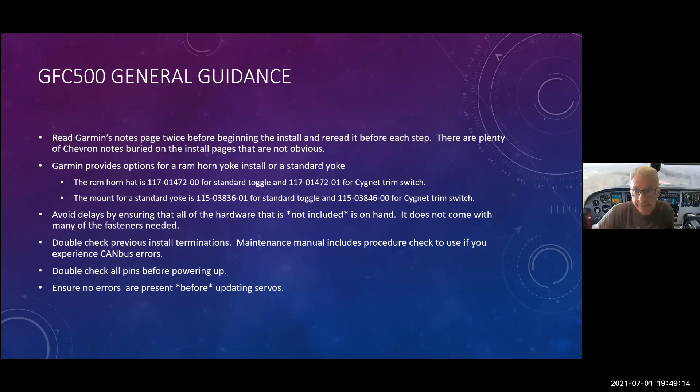I'll just do a pause, there's some rain in the background. CJ, can you still hear me okay? We can hear you great. Okay, perfect. I'm noisy, so I am not surprised.

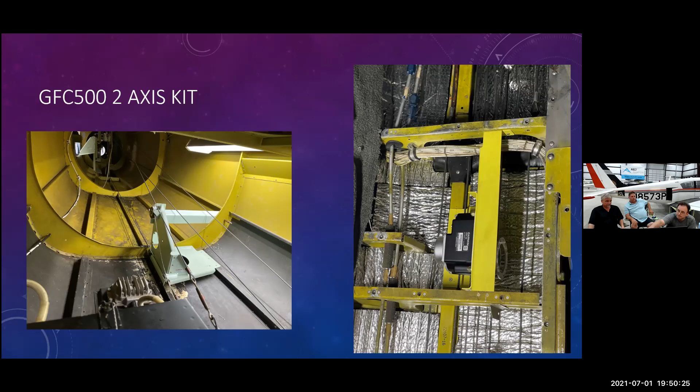So some lessons learned on the 2-axis kit. With the pitch, you'll be doing a significant amount of work in an awkward position in the tail of the airplane - that's kind of an understatement. If you had seen these guys' arms, with blood dripping down from sitting back there, it's very awkward. While the tail is big enough, it's challenging. So we found that foam pads help. There are these 2-inch foam pads that John and Jeff keep around, and by chopping those up and leaning on them, it made it a lot more bearable for longer periods of time.

The most interesting thing about the install of the pitch, which affects the yaw as well, is that there are rub strip cable guards that are difficult to install.

I say this because if you install them on the cables before you put everything else in, then you have to assemble it in the tail. Assembling all of the components is complicated to do while in the tail. If you do it outside of the tail, then when you put it in, you've got to actually put those 4 rivets in, and bucking bars won't fit very well after it's installed. So it's just one of those challenging things that we ran into.

You actually run into the exact same thing with the yaw and with the pitch. Those are the only places where they have those rub strip cable guards.

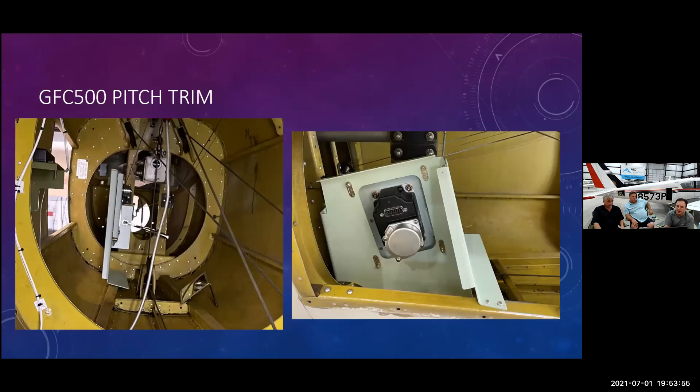The left picture here is what you see on the other side of that pitch trim servo. You can see it's got that large cable. It has that idler on top, and you can see it running forward. You can also see there's not a lot of clearance between that and the stabilator weight, which I'll talk about in just a second. On the right-hand side, you can see the trim drum after it has the new cable wrapped around it that Garmin does provide.

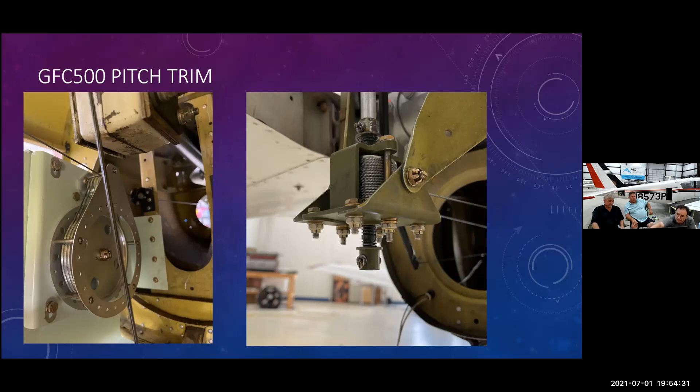The lessons learned with the pitch trim: we used a piece of safety wire wrapped around basically a tail weight stand that had a post coming out, and used that to connect to both of the front portions of the cable, both of the turnbuckles. This made it really easy for a couple of reasons. First, we did not have to redo anything with the front portion of the cable, we kept it intact by keeping tension on it. Second, it allowed us to spin it, so we could get to the different turnbuckles a little easier as we were doing different things on the plane. That was a huge win, and it saved us a lot of time.

Be very careful to count the wraps after the spool is installed in the drum holder. I say this because when I was standing there with John and I inserted the drum, I accidentally unwrapped half a turn when I handed it back to John. We were both looking at it, and when we installed it, we realized the error. We could actually see the error. It was my fault.

It's important to look at this when you're doing it, because it tells you how many counts above and beyond, how many wraps around. You can actually see when it has the right spacing. Just make sure you do it after you install it instead of before.

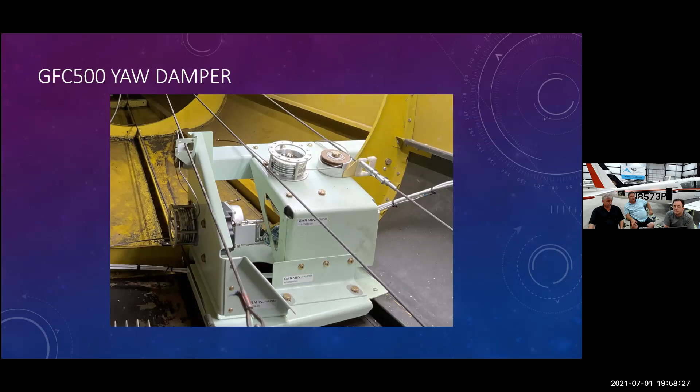If you look carefully in this picture, you can see the cables and the cable guards, and you can see exactly what I was talking about as far as it being kind of difficult, because it's an extension of that pulley, if you will. And if you look by the clecos, you'd see one of the Delrin pieces installed.

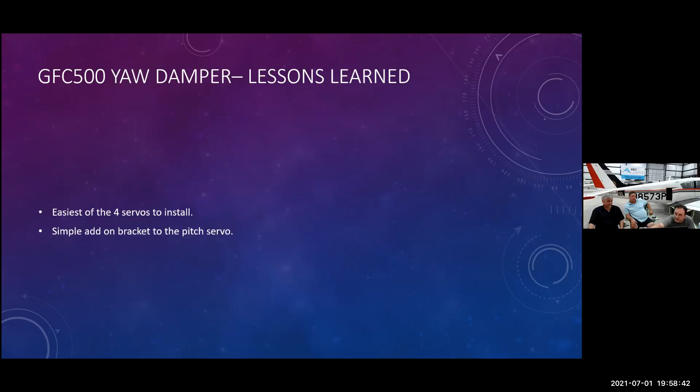On the yaw damper, I won't talk much more about it. It's actually the easiest of the 4 servos to install, really just a simple add-on bracket to the pitch servo. I'll show you why that makes a difference in just a few moments. Anything you guys would add to the yaw?

No. All right, so now I'm going to turn it over to John to talk about the installation timeline.

Just as a precursor, I know a lot of you follow the install on Facebook, and a lot of you saw lots of pictures, maybe some in horror at the amount of time it took, or maybe you were excited about the duration. But nonetheless, this is what it actually took us to do the install this time on the plane.

I'll pause for a second. Do you guys, can you guys hear me still? Yes, we have. You're just fine.

All right, perfect. As far as the installation time, day one was the plane disassembly and organization of the parts that come out of the box. I was there with Jeff. We disassembled everything, laid it all out on the table, and inventoried everything off the checklist to make sure we had everything ready to go. That's a good way to spend day one: organization, making sure it's all there, getting familiar with the installation, the parts, and the documents that come with it.

The pitch trim installation was the challenging part as far as an airframe mechanic or an A&P. It does take a couple of people, you have to have eyes everywhere. Again, measure, alignment is critical. Clamp it, cleco it, whatever you've got to do. Measure 3 times, cut once before you drill a hole. And then it all comes together like butter after that. Follow the manual, follow the manual, follow the manual.

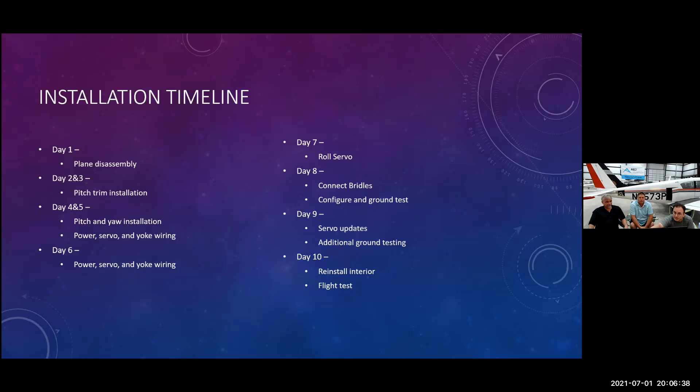I'll show you the flight test in just a moment. One thing I want to mention that's really critical - some of you have seen my video, some haven't, but you'll see it shortly.

A lot of people don't know you get an incredible amount of data out of the G5s and the Garmin system. If you have G5s, the GI275, or the G3X Touch, make sure it's logging the data. In this example, I literally took the SD card out of my top G5 attitude indicator, put it into my computer, and uploaded the CSV file to Garmin.

This can be used for so much - by your Garmin dealer to troubleshoot, or by your A&P to check you're not having alternator problems since it logs the voltage. There are so many uses for it, it's not even funny. I can even see the magnetic deviation I get.

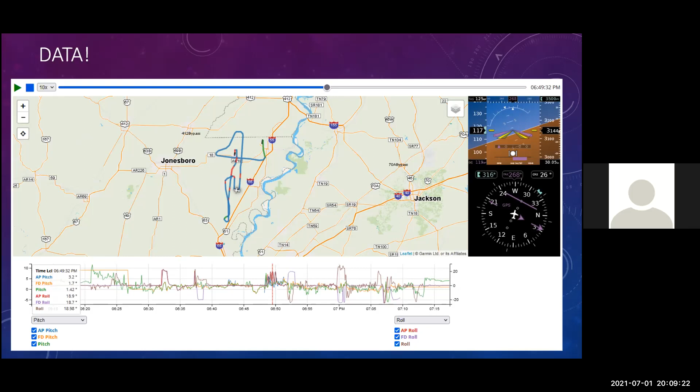Sonny, go ahead. All right, excellent. Just checking, can you still hear me? Yes. Yep. All right, awesome. The rain is picking up, so somebody chime in if it becomes a problem. One second, go ahead and mute your second computer, Sonny. Yep, I am. Okay good, one second, there we go.

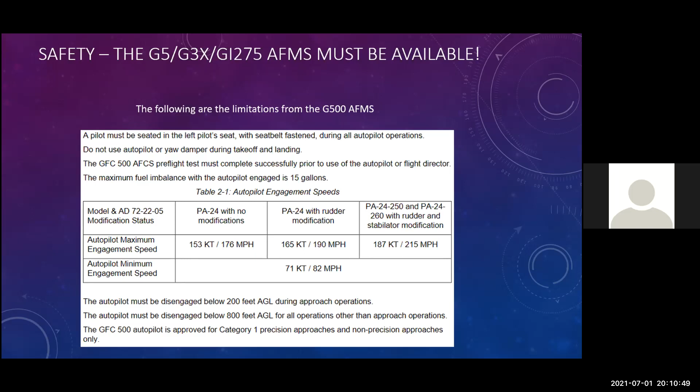Good point, cannot - I'm sorry? I said excellent point, Sonny. I actually drive a Tesla and I see all the people that do that with Tesla cars, and I just imagine them doing it with a plane. Anyway.

Do not use an autopilot or the yaw damper during takeoff and landing. As you may or may not know, the autopilot and the yaw damper can operate independently. So you can hand fly the airplane with the yaw damper on, or you can use the autopilot without the yaw damper. The restriction is you can't use either during takeoff or landing, and there are some altitude limitations you can see at the bottom.

I'll read: the pre-flight test must complete successfully prior to use of the autopilot or flight director. That's an important one.

This one was an interesting one. I haven't seen it called out too many places, but it's a good reminder for everybody on the call. The maximum fuel imbalance with the autopilot engaged is 15 gallons. It's actually pretty easy to get to with a Comanche with 4 or 6 tanks, I'm sure.

One thing that's important, and this comes back to what I talked about in the very beginning, depending on which modifications you have, it changes certain things. So if you've got the rudder modifications and the stabilator modifications, then your maximum engagement speed is 215 miles an hour. If you have no modifications, your maximum engagement speed is 176. So it varies depending on what you have installed in the plane. And your minimum engagement speed is 82 miles an hour for those that haven't seen it.

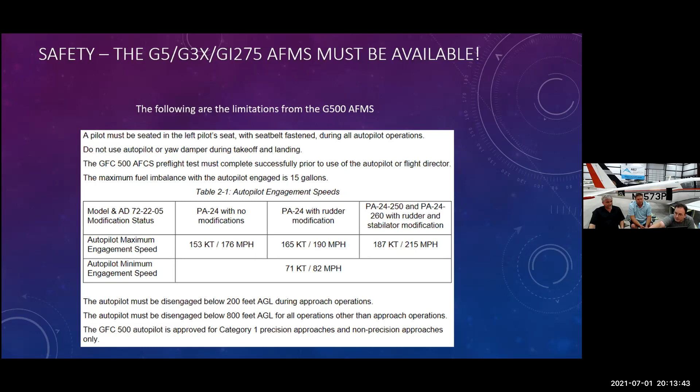I'll keep moving. All right, so the first test flight is here. I'm going to stop sharing for just a second, and then I'm going to share again. So bear with me for just a moment, and then I'm going to voice over the video.

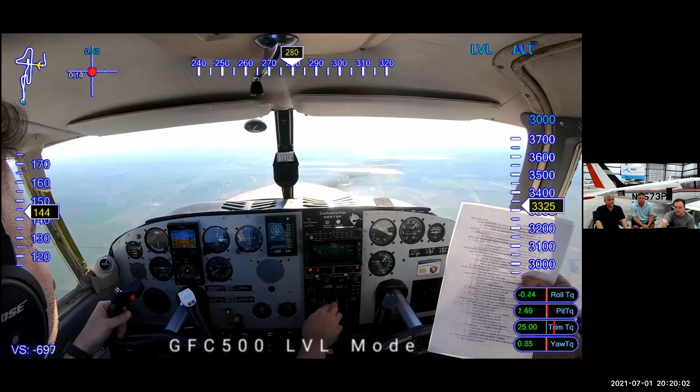There is the exclamation when we push level mode. You can see AP, YD, LVL, and LVL at the top. It is leveling itself, and you can actually see it holding the plane fairly well. That was the blue button test, the button my wife will push if I have a problem when I'm flying the plane. I've already taught her about that button. So that's it for the level test.

This next one is the nav and altitude mode. At this point the autopilot's engaged and the altitude is set to 3,000 feet. You can see the variance in yellow, basically going plus or minus about 15 feet at the most, which I'd consider incredible. That's arguably better than I can hand fly it, given my hours in an airplane.

At this point, you'll see I'm lowering the power in the plane because I wanted to do my tests at a lower speed. What's very interesting is in just a second, you'll actually see the plane command the pitch trim to turn in order to maintain the altitude I'm set at. You'll see it in just a minute. I'm probably ahead of it just a little bit.

In a moment, we'll also click the nav button. You can see I'm still in altitude hold mode. Now you see GPS illuminated at the top right, and now you'll see the plane start to bank to the right. You'll also see me with my left hand hovering very closely to that autopilot disconnect button in case something errant happened with it, but it didn't.

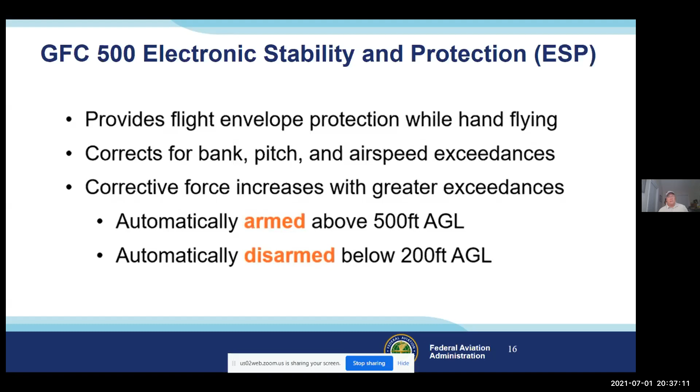This system is automatically armed above 500 feet and automatically disarmed below 200 feet. Later on we're going to talk about how to disengage this feature, which you can do a couple ways. Basically, when you exceed a certain level of pitch, it's going to force the aircraft back down, and same with roll - when you exceed a certain bank level, it's going to force the aircraft back to level, even when the autopilot's not engaged.

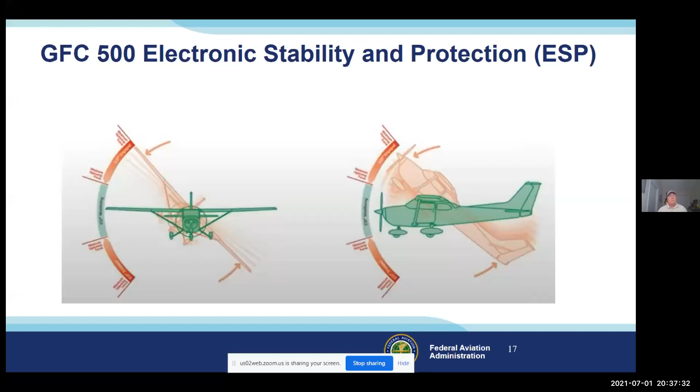So let's take a quick look at the roll side of it. The system discourages banking beyond 45 degrees, and as you increase that bank beyond 45, it increases the pressure to return the airplane back to wings level.

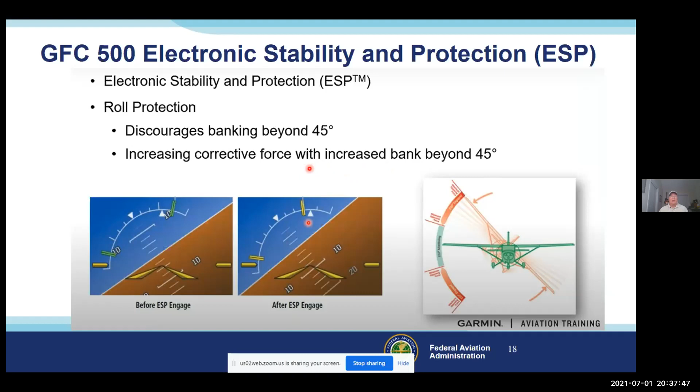The same thing is true in the pitch axis. You can see your positive pitch angle here and your negative pitch angle here, and those limits are set for each airframe. I'm not sure what they are for the Comanche - Sonny and I discussed that earlier today, but we didn't have a chance to look at the AFM which defines that, or the flight manual supplement for the GFC500. But it's going to limit your pitch attitude, and as you exceed that, it's going to push back.

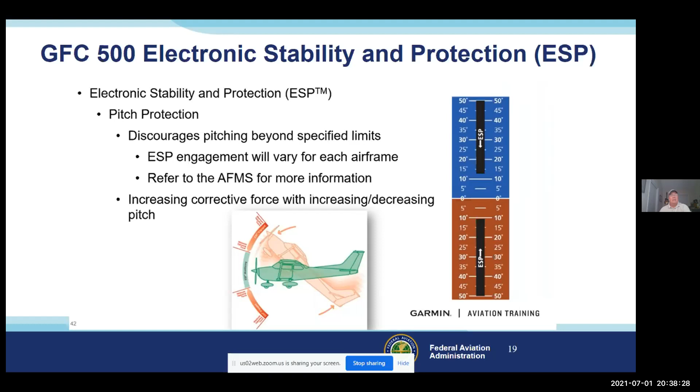I just want to emphasize that this is always on and monitoring your flight for safety. Another feature it has is that if it engages, it automatically engages a level mode if ESP is active for 10 seconds.

Active for 10 seconds in a 20-second time period. So in other words, let's say, God forbid, something happens to you and you get incapacitated and the airplane starts rolling over. If ESP is engaged for 10 seconds in that 20-second period, it's going to automatically engage the autopilot, and it'll climb above 2,000 feet and level via the ESP. So it's going to automatically level the aircraft for you.

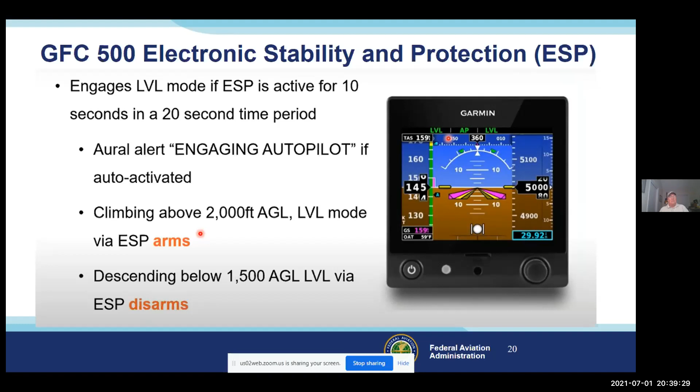If you're above 2,000 feet or descending below 1,500 feet, ESP disarms. So it's just a good safety feature, God forbid something happens to you up there.

It also has high-speed protection, and it pitches nose up to prevent exceeding VNE. Low-speed protection prevents the aircraft slowing below a specified speed by lowering the nose. Some of the requirements are that you have to have a GNS WAAS and a GTN or GTN Xi, and this feature is also always inhibited below 200-foot AGL.

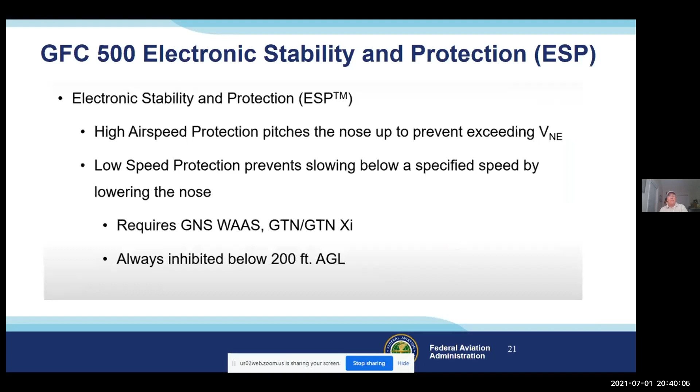When overspeed protection kicks in with the autopilot on, it automatically pitches the nose up to reduce the airspeed if exceeding VNE. You get a visual alert, max airspeed, as indicated in this yellow indication. Your vertical mode will change to IAS, indicated airspeed, and the previous vertical mode will be changed to armed. Then upon speed reduction, the previous vertical mode becomes active again.

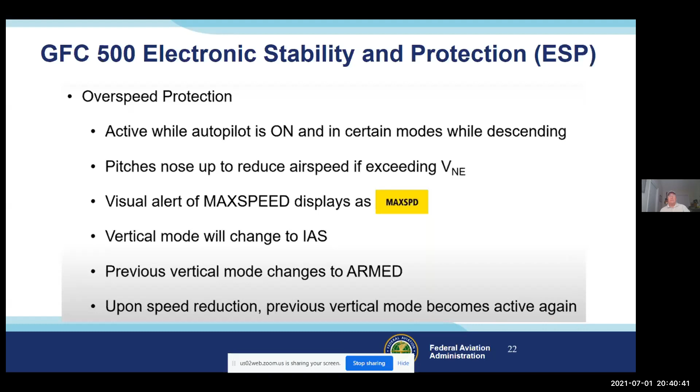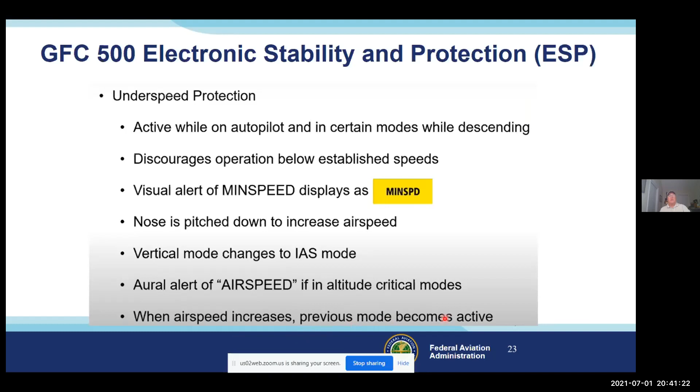And then for underspeed protection - again, this is when the autopilot's engaged - this discourages operation below the established speeds. When you get below that airspeed, this minimum speed pops up on your display, and the nose pitches down to increase your airspeed. The vertical mode changes to IAS mode, and an aural alert of airspeed if the altitude is in altitude critical modes. When the airspeed increases, the previous mode becomes active.

So there are ways to disable this feature if you don't want it on. The first and quickest way is to hold down the autopilot disconnect button on the yoke, and while it's held down and the autopilot's disconnected, that feature is disabled.

So let's say you're doing an approach and for some reason the system thinks that you're getting below your airspeed, and you know that you're good - you can hold the autopilot disconnect down and just manually fly the airplane and override it.

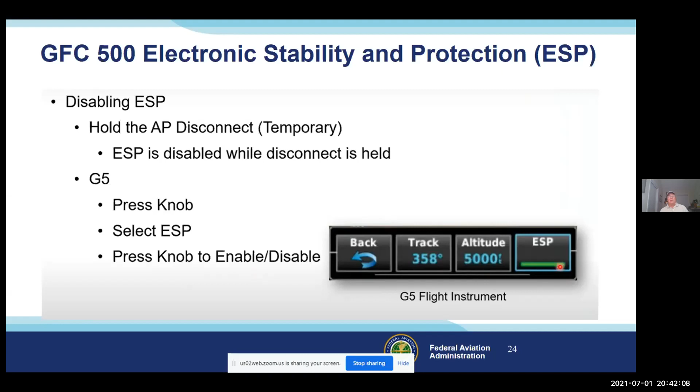If you have a G5 installed in your aircraft, you can manually disable it by pressing the knob and selecting ESP, then pressing the knob to enable or disable it. That green annunciator right there would go on and off, indicating whether it's on or off.

If you have a GI-275, the same thing's true with the autopilot disconnect switch to temporarily disable it. In the GI-275, you hold the knob, swipe up, select the options, and then select ESP to enable and disable it.

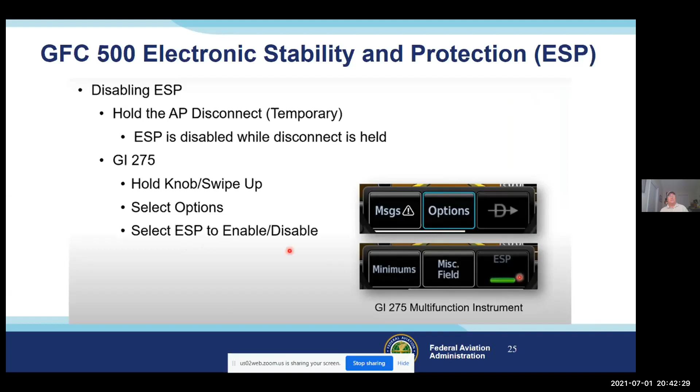And then the G3X touch, same thing with the autopilot disconnect to disable it. Then you touch the AFCS box button and select ESP to disable and enable it.

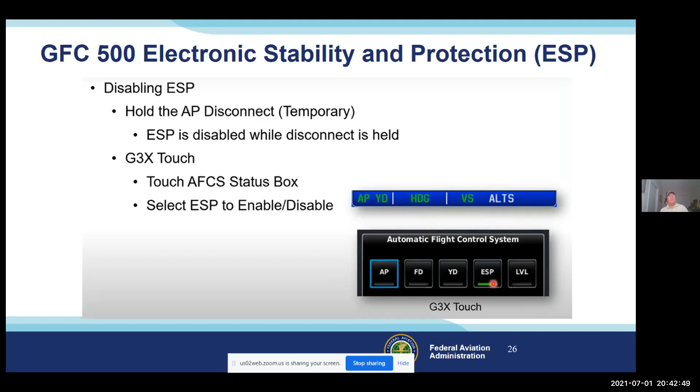I wanted to share this warning feature. It's important that, whether this be a Garmin autopilot or another autopilot, you do not overpower the autopilot, especially in the pitch axis, because the autopilot senses the pressure you're exerting on it and thinks it's out of trim. What will happen is the trim will start running in the opposite direction, trying to remove that pressure. This can result in a large out-of-trim condition when that autopilot's disconnected. So you want to avoid opposing it.

And lastly, I wanted to just take a look at the GFC STC maintenance manual.

And it includes what they call instructions for continued airworthiness for this STC. So all the airworthiness considerations for this autopilot are contained in this document, and it can be found in this link if you want to do a screenshot. If you're interested in downloading, you can just go on Garmin and Google the AML STC maintenance manual for the GFC500, and you can get it that way too.

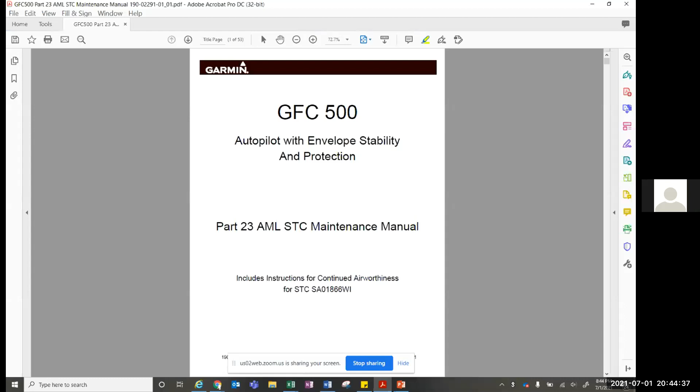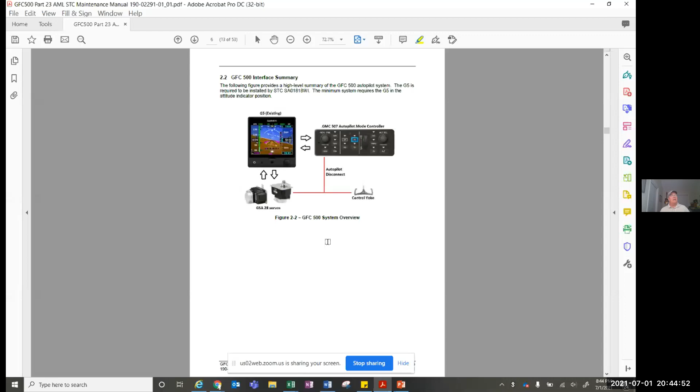So this is what the manual looks like. I'm just going to go through some important parts here. It talks about the maintenance of this autopilot, the pre-flight requirements, gives a basic functional description, and talks about current draw here.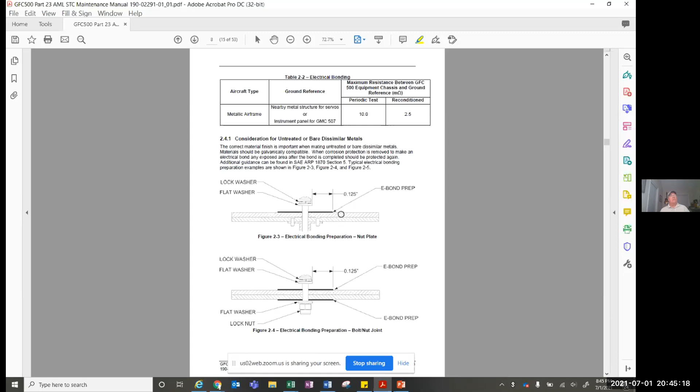Talks about ohmic bonding, or the bonding, which is very important for the trays and the grounding of this system, for lightning protection and preventing noise introduction into the system. Grounding can be a very important thing. As a matter of fact, later on we're going to see where that's a required test every, I think it was 2,000 hours, but we're going to look at that.

And so this is, again, that official document that needs to be part of the STC package, and you should maintain this as an aircraft owner. It's the instructions for continued airworthiness. This is really important to have with you and have your mechanic have, because it's going to detail all the requirements to maintain the airworthiness of this autopilot system.

First, I want to mention that this autopilot is on condition servicing. So that means that there's no real requirements, like the servos don't have a TBO on them, or the gyros, like in some of the older legacy autopilot systems, which may have a time frame on them. There's no time frame on this.

It talks about the required tooling to maintain it here in this section, and then it talks about maintenance intervals. And I just wanted to point out some things.

This equipment electrical bonding test, which I talked about and just mentioned earlier, is very important to maintain. And as a matter of fact, so important that every 2,000 flight hours or 10 years, whichever is first, they want you to perform this test. And in this document they have all the procedure for doing that.

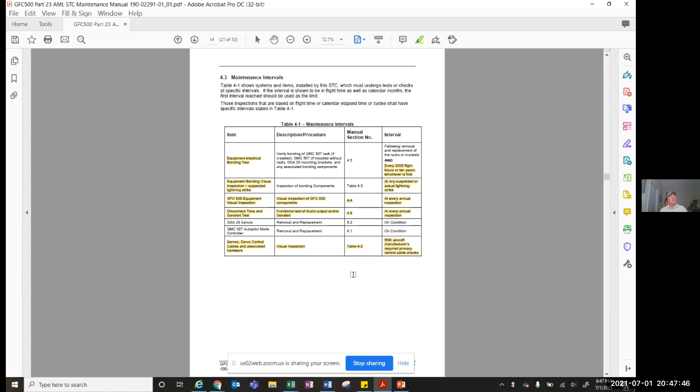And they go into detail what the visual inspection procedure is. And that's, again, a good thing to present to your mechanic and make sure that they're doing all these tests. Again, the lightning strike inspection procedure is very detailed on what you should do.

Just going on, again, some details and a little bit more. I wanted to show you the manual electric trim, pitch trim speed check, which is dependent upon your particular airframe. You basically run it from one stop to the other, both up and down, and it should be in a certain window of time for that running.

This is a document that should be supplied to you also after the installation, and this basically records all the details about the system components that are installed in your aircraft. It talks about the configuration of your system, and you can have this as a record, so that if for some reason that data is lost, you've got a record of how it's configured as installed in your aircraft.

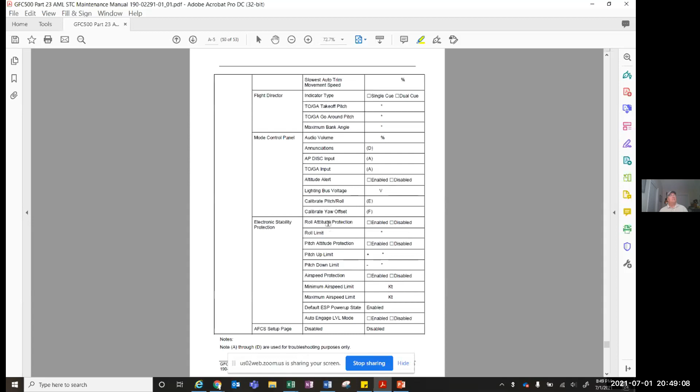It's very important that that be filled out properly and accurately. This is also a good thing where your mechanic's going to identify where that roll servo is installed, where the pitch servo and the yaw servo and the trim servo are installed in the airframe, both looking down from the top, but also from the side of the aircraft.

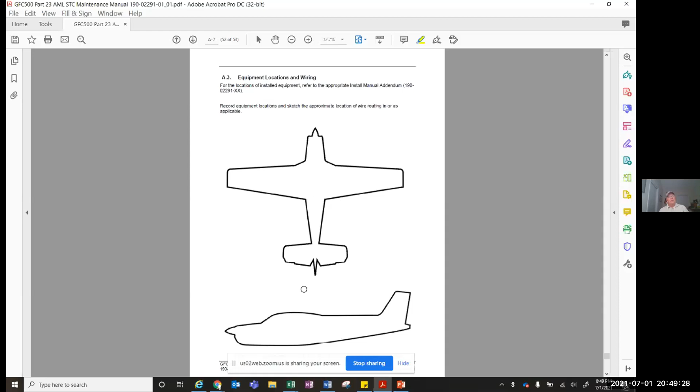And then it's going to talk about the wire routing too, if it was a twin aircraft. See, they're already ready for the twin Comanche. They've got this already incorporated in there.

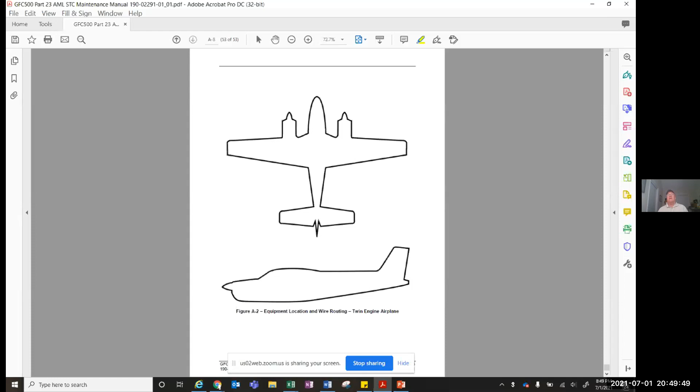And that's it. So I hope that you found that information helpful. And I'm going to stop sharing my screen and hand it back to you guys.

That's because you don't have to be wiping us off the floor when you find our sad little bodies when we don't use them.

Then became the avionics manager, kind of got it from all sides, and it makes your input, having that broad perspective, really uniquely valuable. So thank you for coming in and taking the time to go through the manuals and highlight for us some of the things we really need to be looking at.

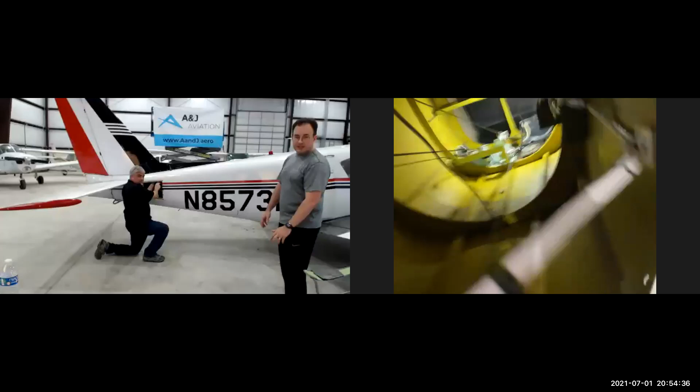So what we're going to do is go in the tail, and John, do you want to hold it? And so can everybody see? You can see, I'm pointing at my screen, not that it helps, you can see the pitch and the roll servos.

And you can also watch the tail, by all means watch the actual stabilator. Jeff, do you want to do pitch? Yeah, those hands are clear. Good job. All right, can y'all see it moving? And how smooth that is. Do y'all see it or no? Yes. All right, so perfect. Pretty exciting to see it go.

So the other one, he's doing the roll right now. No, hold on, we'll go down. You want to do the pitch trim real quick so they can see the actual trim going once it stabilizes? So you can see it going back down, and in a second we'll use the manual electric trim, and you can actually hopefully see the trim go the other way, Jeff, if you can.

Or no, I guess you should have went that way. You should have went the other way. I don't know if you guys can see it. Can you guys see it, Target? Yes, yes, all right.

So you can actually see it's actually turning up with the camera. You can obviously see it rolling through. Yeah, I think so, there we go, yeah. It's going right now, yep, it's going right now. And if you look at the plane, you can probably see it.

Garmin is sensitive to the speed of your plane, so it can run a different speed whether you're going fast or slow. Obviously this is a different speed.

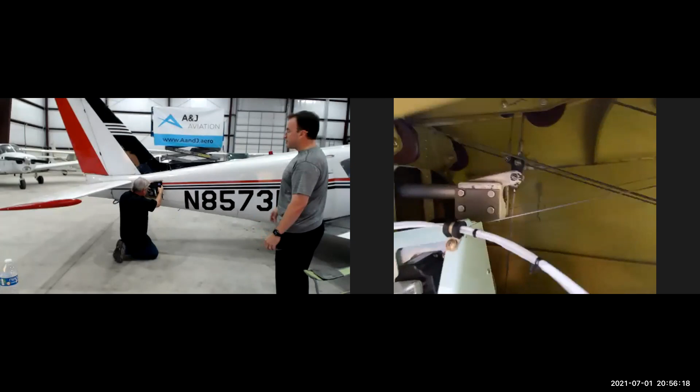So do you do pitch? Yeah, and we'll do pitch again, and you can see the balance weight going up and down. The pitch up. One second.

And while you're doing it, just because this just came up in the chat window, is that idler pulley lubed internally, or?

I don't know that I can answer that question. It is a sealed bearing inside it. So I believe because it's a sealed bearing, it basically doesn't need lubrication, but I would defer to your A&P or your Garmin dealer for that. That's correct, that's correct, Sonny.

So you guys saw the pitch, and let's see, do you want to see the roll? Jeff will show you the roll. Can you guys see in the plane? All right, and so now Jeff will make it roll. Thanks a lot, Sonny, if you could, okay, there you go, we can see that.

Hopefully you guys can see it banking back. If you go back the other way, yeah, if you could actually see, can you go back? Yeah, I'm going back, you'll see the move. So, very smooth and just very, very fluid. There you go. So it's the whole new ghost in the machine.

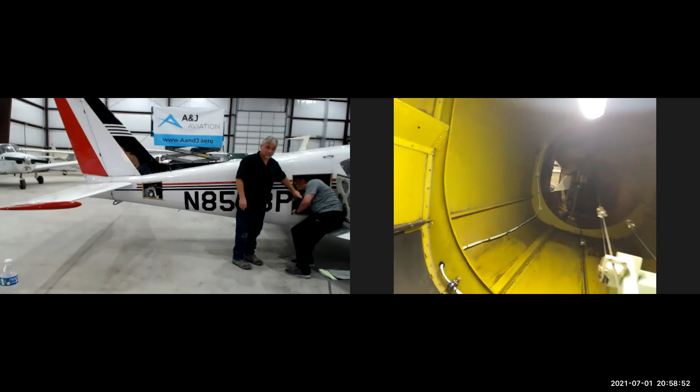Okay, so you can actually see down there the connections, the way it's all wired up. You can see how pretty it is with the Adels along the side and the lacing, and how clean it is. In fact, it makes the rest of my plane look dirty.

You want to look at the roll again? I've got it where we can. If let's see, we'll... Roll left, roll left, really precise. And then roll right, you can see it just kind of spot on.

That's going in, is that in heading mode, Jeff? Yes, so that's in heading mode. So you can see it's using the magnetometer to do that. And of course you can see the tips roll as well.

And then Jeff will disconnect, and I'll also show you, no it's okay, we're okay. All right, I think, and so there are still some panels to put back on the plane, just to be crystal clear. But for you guys looking, we've got to fabricate a new panel for the bottom, but this...

Yep, so this is effectively my Comanche panel now. And like I said, we still have one or two more things to put on, but she is airworthy and she flies beautifully and the autopilot works like a champ.

One thing I will say to everybody - we're going to power the plane down, but I'll leave this on for just a moment. The head unit, the GFC500, it's not just a button panel. It's actually got accelerometers in that unit, so if it's not mounted, or it's moving, you have to have it mounted before you do the calibration. I say this because Jeff knew it already, I didn't, and I really thought it was just more or less a button panel. It's not, it's smarter than that. If you read the forums, I've seen reports of people having it go bad and needing it replaced. So it's not just a dumb button panel, it does have smarts built into it - very advanced.

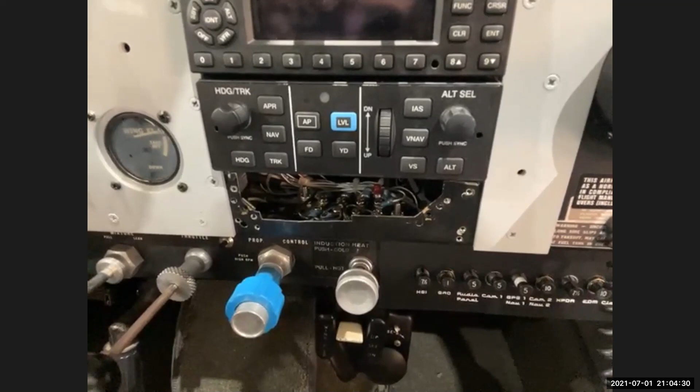There's a question about a disabled person getting into the 260. I don't know that I'm the best person to answer that one, so I'll defer that for now. How does the idler pulley get lubed? Let me jump into that one very quickly - our Comanche 260B, before we had it, was owned by a person with polio, and they flew it with a hand control. I don't know what the full question was because I actually had a disconnect that killed my chat window, but does that partially answer the question?

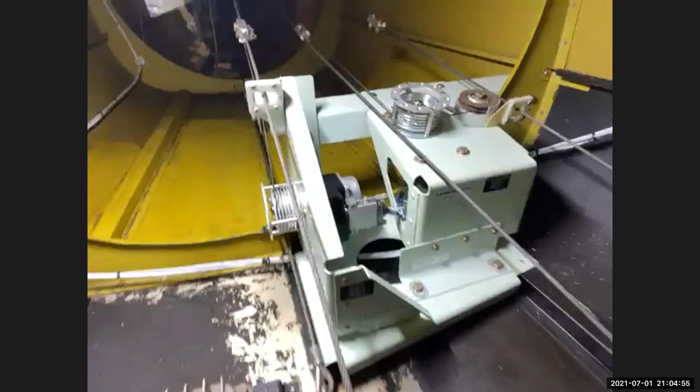All right, should I - I would say this capability would have been amazing. Yes, should I continue, CJ? Over to you, Sonny, go ahead, continue.

All right, so idler pulley getting lubed, that one we talked about, it's sealed. I agree with Nima, the pilot's guide is a wealth of great information. Agree about the stabilator weights, no question there. Somebody asked if I don't have a vacuum pump anymore - no, I do not. As part of the G5 installation, the dual G5s, I actually removed the vacuum pump from the plane. It was actually not used for anything once I installed the dual G5s, and I'm happy to be rid of it, to be honest with you. I lost a lot of weight in the plane when I was able to remove that, not from the pump itself, but just from all the tubes and whatnot that went to it. Behind the panel opened up a ton.

Should the pilot be hand trimming out that servo torque? I don't think so. Part of what gets you in trouble is overriding the autopilot in any form or fashion. Because this one has auto trim, I don't believe I should be trying to override it at all. I think that would be dangerous. I could disable the trim and manually trim it, but I'm not going to do that.

There's a question about Baron Pilot. I know A&J did the install on Baron Pilot, so I'll let Jeff answer that. He had to step away for a moment.

I did not have to drill out the floorboard rivets - you asked if it was done already. My floorboard did not need to be drilled out because it already had the nut plates, so we were good. I was very thankful for that, as was Jeff. I am fearful that would be a pretty big undertaking by itself.

Nima answered something about pricing, I won't go to that. Can I rename my iPad to Sonny?

Someone asked whether the pricing included G5s or GI-275s. No, the pricing assumes you have G5s, GI-275s, or G3X Touches appropriate for the plane - it requires that to be in place. You could get by with one G5, but you'll compromise on functionality, just like you could get by without a navigator, but you'd lose the GPS nav function. That's an important thing to note. A&J can do any of those things for you if you choose.

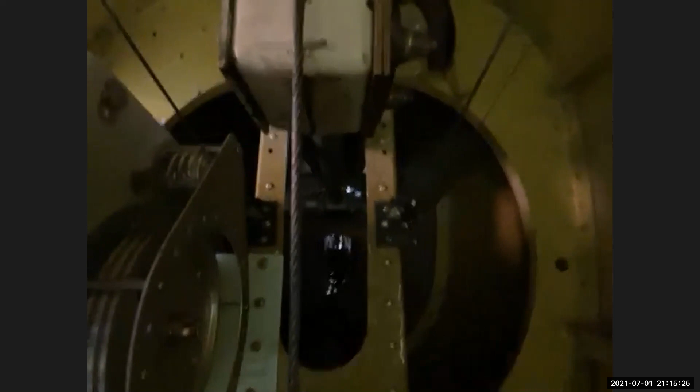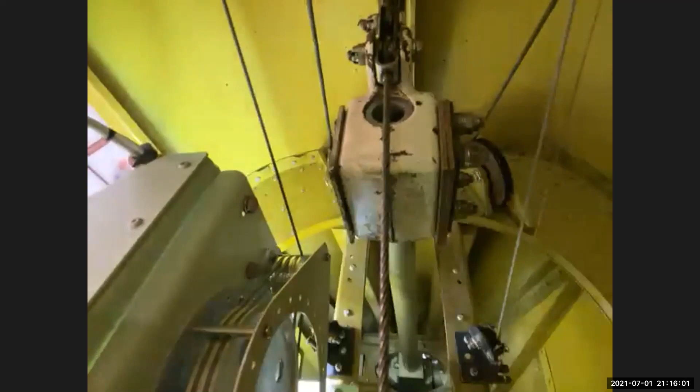Right, yeah - other way, other direction, the bulkhead, there you go. If you notice the two drilled holes left and right above the two pulleys in the phenolic guides - there's actually a phenolic guide on my '59 that has the cable going through it. In later models, Garmin is going to come out with a revision saying to drill the phenolic guide off and just install the bridle cable on the trim servo. But it's kind of funny how your model has the holes drilled exactly where my phenolic cable would have been installed. It's really funny, Hunter, because we've got another Comanche in John's hangar that's actually in the corner.

It needs some love if anybody's interested in a Comanche, but it actually has the phenolic blocks with the lines through it. So after you told me about that, we went and checked that one and saw it, and I was thankful. My avionics tech actually emailed Garmin and they're on it. They sent out a tech, and they're going to revise the manual. What they said was to drill the phenolic guide off and drop the cable down just a little bit to line up with the bridle cable on the servo. It's crazy to see the different variations of the models.

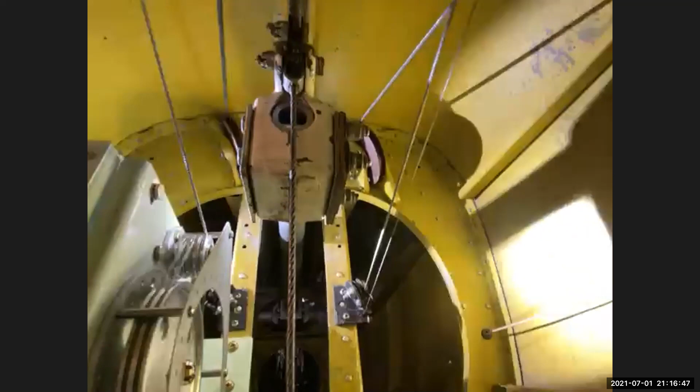Another thing on my '59 - don't quote me on this, but I think Zach Grant said everybody had a riveted-in floor till 1963. Before that, it was all riveted in with explosive rivets, so you'd put heat on them and they'd explode, like back in wartime. We had to cut holes in the floor for access, so we don't have to drill the floor out every time we want to work on the servo. It was pretty neat and different. I think 1963 and older are going to cause a bit more of a price increase because of the labor to install the servo.

Well, the labor too, because I don't imagine you're going to use floating rivets to reinstall the floor later. No, and all the nut plates. I had to reach out to all the old guys on the forum because I was looking at the rivet - it looked like a Cherry Max rivet on the shank, but the head looked like a solid rivet. I'm like, what is this? Well, it turns out it was an explosive rivet.

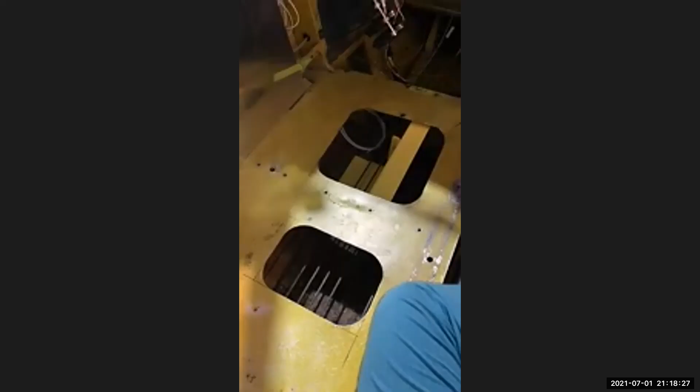Yeah, so those were the holes we ended up cutting into the floor, because when you remove the servo, you don't want to have to remove the entire floor to get to it. You've got to remove the side panel, this, that, and the other. But the front - this is reversed, so this would be the pilot side, just think about it backwards. The front hole is to install or remove the servo in a service technique, and the rear hole is to get to the bridle cable to attach it.

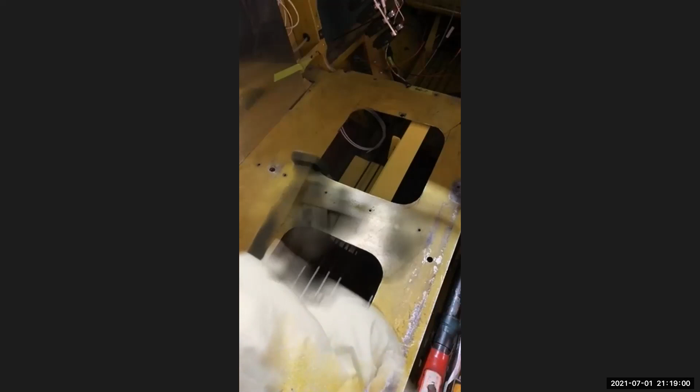Yep, but I don't know, I would say another 4 or 5 hours of labor just to cut a hole, add some nut plates, and screw it in.

Did you have any trouble attaching those two forward-facing rivets on that bracket? Yeah, on which bracket? I know that bracket. Yes, for sure. So it actually calls out for a special rivet - I don't know if y'all realize that, but it is rivets. It's an AN4 rivet, but with an AN3 shank, if I remember correctly.

Yeah, so one fun fact we didn't include in the presentation - we couldn't find those rivets easily, but there was actually an oops kit that John found, or Jeff found. A lot of the RV guys have that, because they kind of drill a hole out too big, and then they have a big old oops, the big head. So it had those rivets in it. And just looking at the floor of the original models, it had a big shank or a big head and a little shank - I guess they just wanted to carry the load like the earlier models did.

It's crazy to see, 62 years later, we're kind of caretakers of these old antiques. Very cool. Alright, anyways, back to y'all - that was the two little things we found so far.

So I know Chris has a question out there for Jeff. Chris asked, could you share how much of the price is materials versus labor? The quotes I've received are significantly higher. I'll answer one question, then turn it over to Jeff.

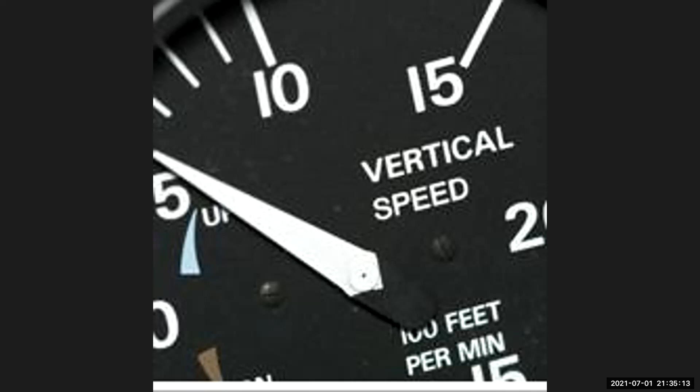Everything is in the service manual - everything related to the plane, the Comanche, is in the service manual. It tells you exactly where to put the tensiometer; in some cases it's right up front, in other cases it's elsewhere, but it tells you exactly where to put it. It's all called out in the PA24 service manual, that's what we used. The tensions for the bridles are all called out in the Garmin install manual. So what is it, 20 pounds, or how much tension do you put on them? 60 pounds? What's the tension on them?